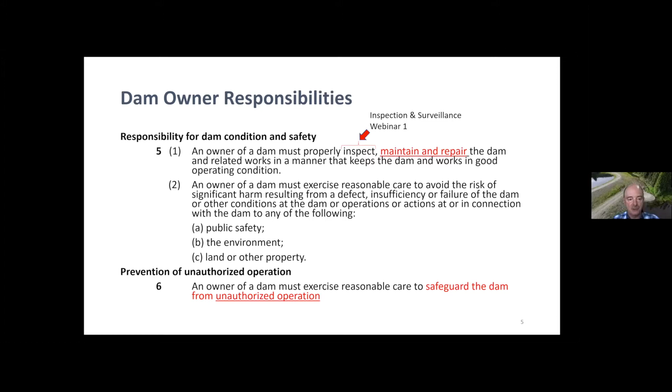So this is where we live, and it's a requirement. It's a responsibility for a dam owner to maintain and repair their dam, keep it in a good working condition, so that no harm occurs to the public, the environment, or properties downstream. And that includes preventing unauthorized operation of your dam. For example, your low-level outlet - you've got to make sure somebody else can't come onto your site and open up a gate valve or stop logs and cause flooding downstream. So those are embedded in the regulatory requirements.

To meet those regulatory requirements, a dam owner is going to have to store the water for the intended purpose. The water license is linked to a specific purpose, and you should know when you need the water and how to operate the dam. A little bit on today, and certainly next Saturday, what do you do when you have extreme inflow conditions - a larger than normal snowpack combined with early season extreme precipitation events? You need to know how to handle those conditions, and they should be embedded in your operations, maintenance, and surveillance manuals. These extreme conditions hopefully don't occur very often, but when they do occur, it's important that you know what to do.

And that's making sure that you operate your dam in the correct manner, and ensure that things like your gate or outlet valve work, because it may be important to use that to draw water down. Make sure your spillways are adequately sized and not blocked. Making sure that you have physical access to your dam, and that the roads aren't washed out or you're impeded in terms of your access.

And then we'll talk about that today. Vegetation often can inhibit access to the dam, the road access or the physical access onto the embankment itself, and it can prevent convenient inspection of your dam. So vegetation management is a never-ending challenge when you own these dams.

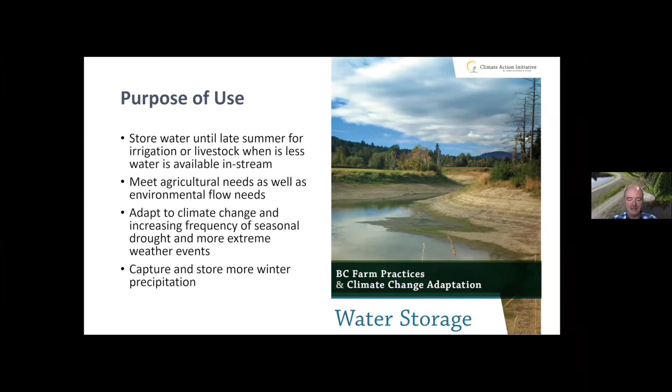If your dams are subject to Part 3 of the regulation—we talked about the dam classifications and what dams fall under Part 3 of the regulation last week—that's probably going to cover most of the people here today, based on the dam classifications that were reported last week by the dam owners.

You need to have an operations, maintenance, and surveillance plan. We often call that an OMS manual. It's a written document, and almost all dams should have this document. The degree of complexity of this document will probably vary depending on the consequence classification of your structure. So we talked a little bit about the surveillance part of that plan last week. We'll talk a little bit about the operations and maintenance part of it this week.

So what would typically be in an OMS manual or this plan? Of course, some information about your dam, and information about how you access it—maybe alternative access routes, particularly if you have an extreme climatic event and one road gets washed out. Well, do you have a plan B? Is there another way to get to your dam to operate it during that extreme precipitation event?

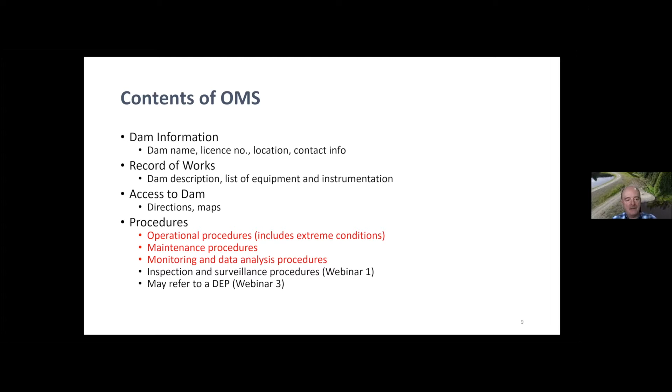Just like last week, to keep things a little bit interactive and for us to understand the audience, we have some polls we would like to run. This webinar has got four of them. They're very short, you don't have to participate if you don't want, it's anonymous. I am going to launch the first poll now. All you have to do is click your answer. I'll give you maybe 10 seconds to answer the two questions: how complete is your OMS manual, and have you referred to it at least once in the past year?

We've got a dozen people who have responded so far. I'll just watch the rate of response and end the polling as it dies down. We're coming up to maybe 50% of the people deciding to answer. I'm able to see the response rate live, but I'll share that with everyone shortly. It's slowing down now, so I'll end the poll and share the results.

Here are the shared results. How complete is your OMS manual? 'I do not have one or have lost it' is dominating the responses from people attending today. If you are under part 3 of the regulations, you really are supposed to have one of these documents, so please try to take advantage of the links Aaron has sent you. Those who do have one appear to be looking at it or referring to it once a year. So there's a little bit of feedback, you can see how you're stacking up versus other dam owners here in the province.

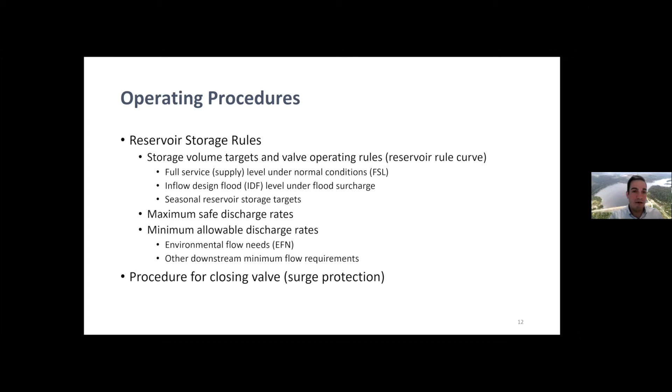So here's going to the rule curve slide. So Dwayne, can you see my mouse moving there? Oh, I'll jump back. Can you see it moving on the screen? Okay, so this is what I'm talking about here.

In the spring, or I should say winter - we're talking January here, right about this time - we don't really have a lot of water in there. We might have a lot of snow around our catchments. It really depends where your dam is, but this is pretty typical. And then as spring comes and it melts, it fills the dam.

So just looking here, let's pretend this here is all our live storage. From our valve to where it naturally spills over, this is our live storage. We may have an annual average demand of this amount, and we typically might have a licensed storage amount for a dry year - so we may be licensed for this much water. So typically we have a little bit of buffer balance in there, and also surcharge, right? If we get a big spike inflow, sometimes we have some additional freeboard here.

So this is what we're talking about. This is our dam system, however, whatever type of dam you might have. And this is what our rule curve might be - the amount of storage going up on the vertical axis and the time from January to December in any given year. So we have freshet, where typically our reservoir is filling, and then we have our demand, where it's typically decreasing, and then it starts to come up.

So this we call the rule curve, for those who aren't aware. We're going to want to basically - in different years, if you were to track your reservoir levels, it would go all over the place, but on average, we would want it to look like that generally. I realize most of you might say, oh, well, we don't need this in our manual, because it's pretty simple - you close it in the wintertime, you open it late in the summer when you need it - and that may be all you need, just two rules of thumb.

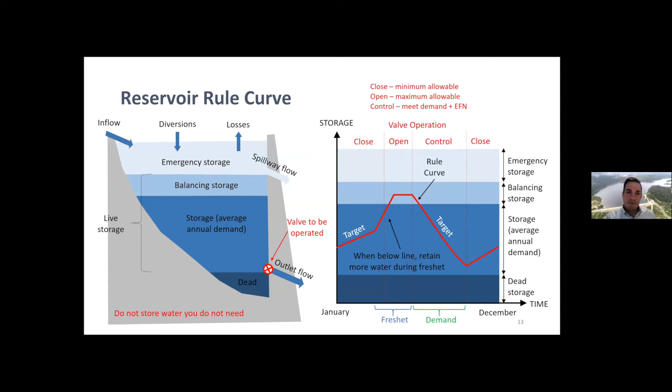So, maximum safe discharge rates. We'll have some examples of this later, but this is it in a nutshell: the maximum flow you can safely release. You need to know what that is.

The stability of your dam and reservoir slopes could be affected. There are hydraulic design limits, whether it's the size of an outlet, your channel, or a number of things. We'll go over this in more detail. Your low-level outlet—there are a lot of things people don't think about.

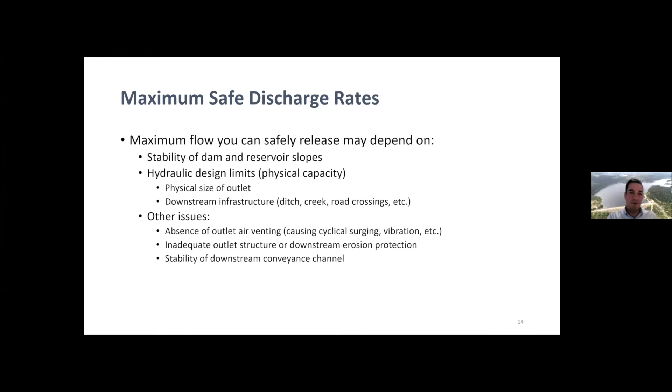Depending on the type of flow going through your low-level outlet, you could cause a hydraulic jump, where it goes supercritical to subcritical, and you may get this wave of water coming up and down inside your pipe. At certain openings, if it's not a properly vented system, you could have surging and even negative pressures. So there are things to be aware of when you plan how far to open your gate, because you may cause cyclical surging, which could damage your low-level outlet. We'll look at that more later in this workshop.

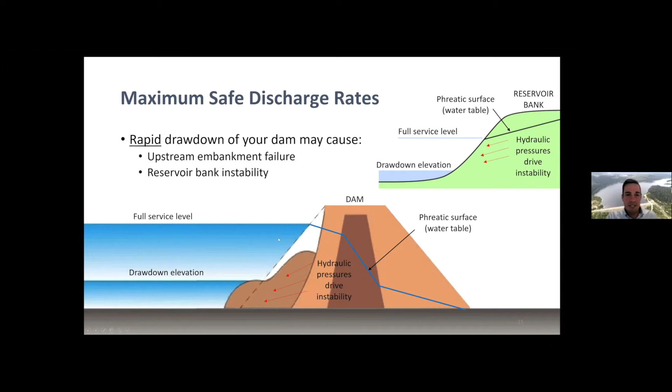Here's an example: if it were the upstream of your dam, here's the hydraulic or phreatic surface through your dam—the level, kind of like the level of groundwater. If you draw this down quickly, it could slump back because you don't have the water pressure holding the dam. It may not be something you need to worry about with your dam, but it demonstrates there could be a lot more going on that you should be aware of.

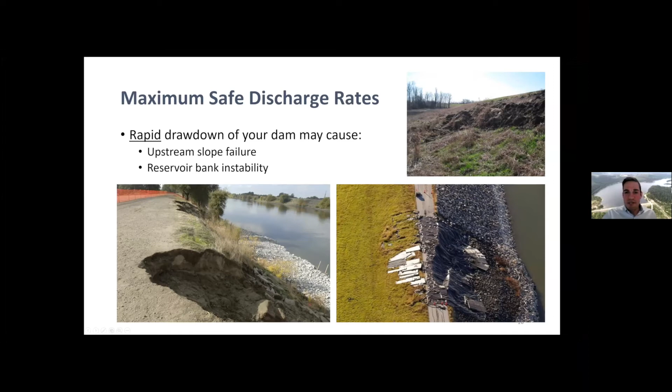Here are a couple examples of some slumping. This is definitely a slope going in. I'm not exactly sure if this was from a rapid drawdown, but certainly some of these are. These are the types of things where you could get some instability.

So, maximum discharge rates. Even if you don't have a flood, if you release water more quickly than it could otherwise flow downstream, you need to be aware of what some of those limits are.

Here's an example of a little creek crossing, a little bridge—you definitely wouldn't want to cause something like that just by the operation of your dam. This structure probably has quite a bit of capacity, but that may not always be the case. If you have a really large low-level outlet, a structure like that could actually have less capacity than your upstream valving. So it's important to look at your design and understand what types of constraints you might have.

Other things to consider too—is it a type of design that could clog the system up? Just a side note, I don't particularly like these designs, because if you ever try to inspect them you're usually knee deep in water, and if you ever want to camera or rehabilitate the low-level outlet, you have poor access.

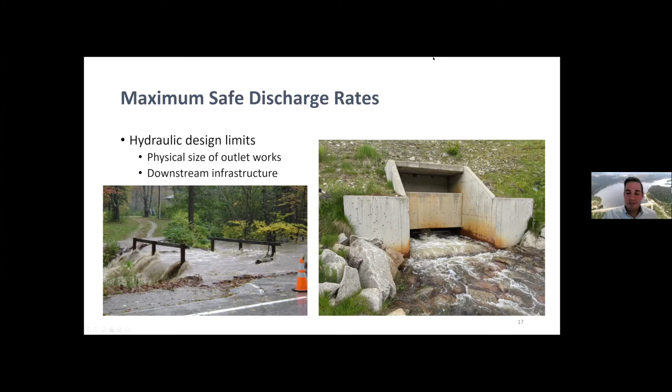Anyway, that's just a little side note there. But we are talking about repairs and maintenance, so lots of things to be aware of, especially when you're upgrading.

So I alluded to this before, the safe discharge rates. If your low-level outlet is not properly vented, here's what I'm talking about, different types of flow. If you have just a small opening and high head, or a full reservoir with lots of pressure, it will shoot out like a jet. So it'll be a different type of flow than if it's, let's say, tailwater controlled with low head. It'll flow through quite differently here, and so the demand of air in this pocket will be very different.

And if you have something like this where you have a bit of a hydraulic jump, where you have a full pipe, this pocket of air could be surging, and you can cause some problems. So anyway, one thing to be aware of is test your valve system, release it, see how far you can go, and try to listen for that pipe. Is it chugging? Is it doing something? Look at your downstream and find out what your system is capable of doing.

Here's an example of what happens if you fill a ditch really full. The side banks get saturated, and then you shut the valve quickly, and what happens is those slopes of your irrigation ditch are still saturated. There's no water pressure behind it, and it slumps in. And so you could have failures like this.

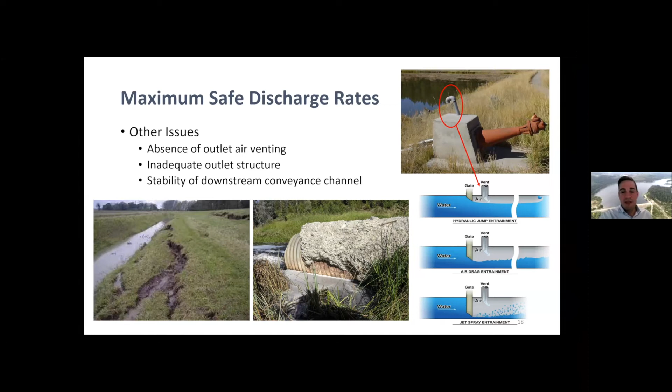Other problems are excessive scour. If it's not properly protected from that erosion or those tractive forces, it can break down over time, and so that's another constraint to your system.

All right, so operating under extreme conditions. I just want to reiterate, or at least make a distinction here. Extreme conditions are not emergencies. We're going to be covering emergencies in our next webinar. So we're talking about under typical design conditions.

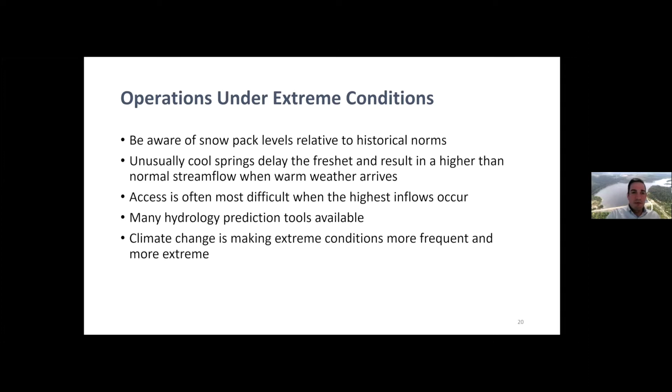Our dams are designed for sometimes 1 in 200, 1 in 1,000 years, so we need to be aware of those and plan ahead. Here's an example: you could jump on the River Forecast Centre, learn about and be ready for all kinds of events. I'm just going to share a quick link here. If you were to check right now, the interior and places in the far north do have quite a bit higher flows, and so we can expect that in the spring.

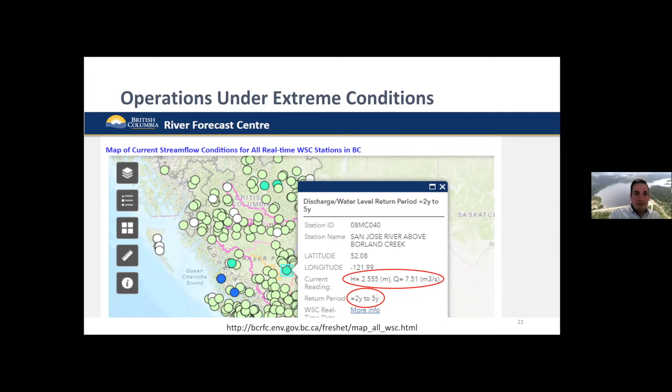Here's an example we covered in our last webinar, and we're going to take it a little further. Let's pretend you have a dam, and you have an extreme rain on snow event. Here's a clue: it's less than the design event. The reservoir is near maximum, so the surge water is coming up.

So everyone feel free to chat, you can chat to myself. What would you do, right? Extreme rain on snow event, reservoir is near the maximum. Does anyone have thoughts on what they would do? Would you just kind of hang tight? Would you check the river forecast system?

Here's a little more information. The downstream Forest Service road has just failed. Houses below are beginning to get flooded. Let's say you've got a downstream neighbor calling you, they think your dam might have breached, and they're starting to get a little worried. What do you do as a dam owner? Do we have any comments?

Hopefully your OMS has some guidance for how to operate that dam under those extreme inflow conditions. Exactly. And if you have your OMS manual, you know how far you can open your valves, you'll have a little more information there. In the interest of time, I'm going to just keep going here.

And the important thing is you do not compromise dam safety. So you always want to allow the inflow of flood into the reservoir to pass your dam, right? We talked about the purpose of your dams at the beginning, and these are not typically flood protection dams. These are for the purpose of irrigation. Sometimes they also provide some attenuation, but that is not the purpose of the dam. The purpose of the dam is to provide irrigation water. So when a flood comes, you just pass it through the dam.

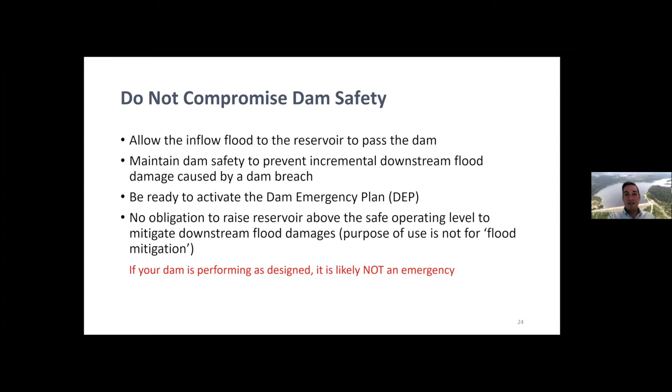But if you don't do that, you could potentially overtop your dam. So if your dam is performing as designed, it is not an emergency. You stay the course, you open your valves, and you pass that flood.

So there's no obligation to raise your reservoir above safe operating conditions. Dam performance - a properly designed, constructed and maintained dam can withstand larger floods and earthquakes. So do you know what yours is designed for?

Those are things you want to know, and they should be listed in your operation maintenance surveillance plan. If you're looking and the river forecast system says you're going to get a 1 in 500 year flood, and yours is designed for a 1 in 200, you might want to plan ahead and start drawing your reservoir down so you have additional capacity, because you know it's not designed for that. So again, there it just says OMS manual.

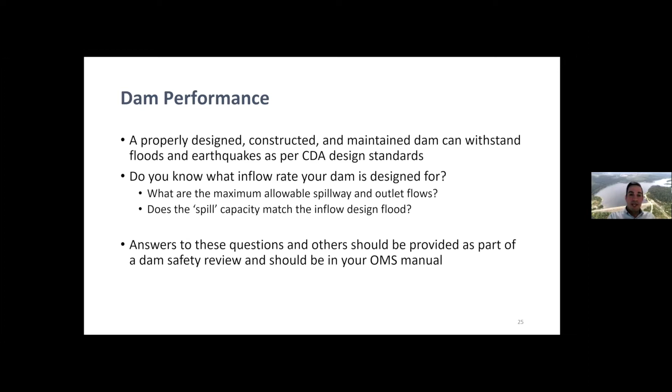So, sorry, I'm jumping through here. I'll just skip that one there.

I think the answers would be pretty clear, especially if you knew what's in your operation maintenance surveillance plan, because it'll say if it goes beyond these levels, it's probably an emergency. And then you'll have your dam emergency plan, and we're going to talk about how to activate your emergency plan, who the notification lists are, and so forth.

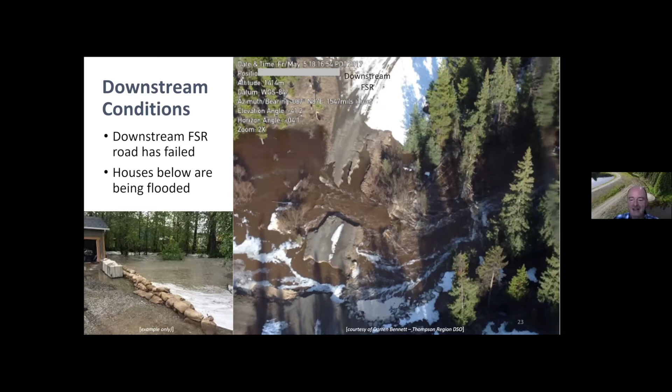So, Dwayne, you can take it from here. Sure. Yeah, just wanted to come back to this very briefly. I mean, if this is happening downstream, it's not because your dam's failed. It's because the flood that's traveling through that watershed is an extreme event. And as long as your dam is performing as expected, you're fine.

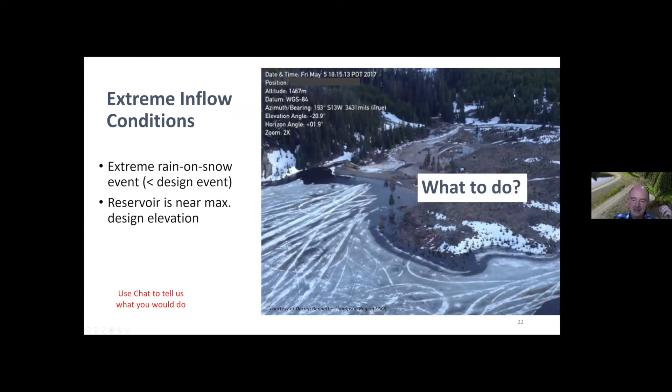But the interesting thing is, if you felt obligated to try to help your downstream neighbors by holding back extra water, and by doing so that causes your dam to overtop and breach, then you're kind of liable because you weren't operating it the way you should be operating it. So it's really useful to do the mental exercise of how would you operate your dam under those extreme event situations, and is that extreme event situation actually over and beyond the capacity of your spillway typically to pass that water?

And then we do have that as an issue for some dams. The spillways really are under designed as we get more and more information about the return periods for extreme climatic events. Climate change is also throwing another wrench into the whole thing, because we can expect to have perhaps more frequent flood events. But we want to make sure that you're operating as safely as possible and not doing something that actually creates a situation where the dam breaches.

This dam did not breach, right, Aaron? No, it didn't. That's about as bad as it got. Yeah, but that's about as bad as it can get. Yeah, yeah.

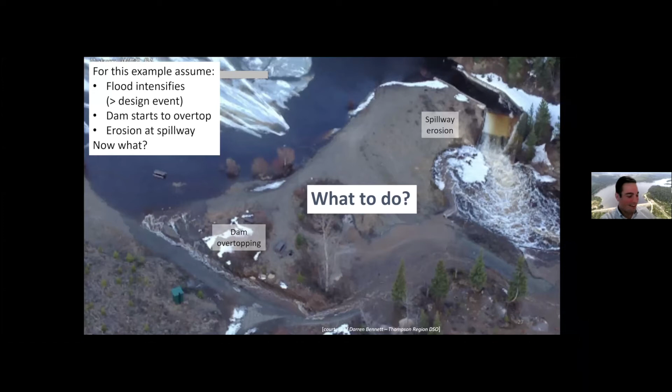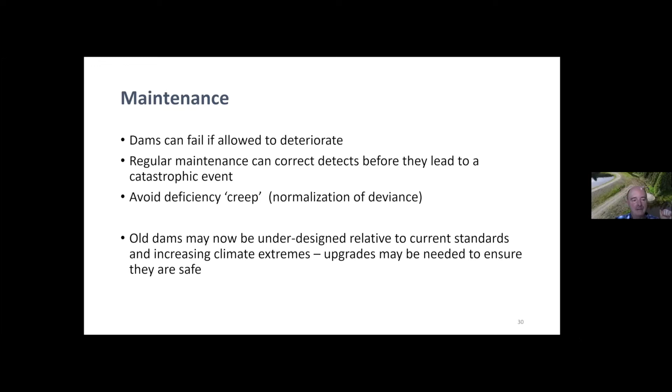Now, of course, to engage in maintenance, you need a schedule and some financial resources to handle that. So you should budget accordingly, set aside some money for routine maintenance, and then for those occasional and more major repairs, you need to know what dam components you have and what their maintenance requirements are, particularly mechanical components associated with your low-level outlet.

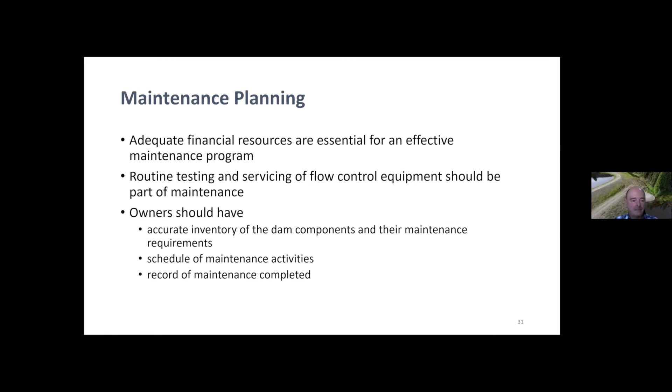Hopefully in your OMS manual you have a schedule of maintenance activities. It's kind of a reminder, no different than changing the oil in your vehicle, and occasionally doing some transmission fluid and other major repairs. You can think of that same schedule needing to be established for your dam, hopefully documented in an OMS manual, and keep a record of what you did and when you did it. So we're going to go through some examples we were able to pull out.

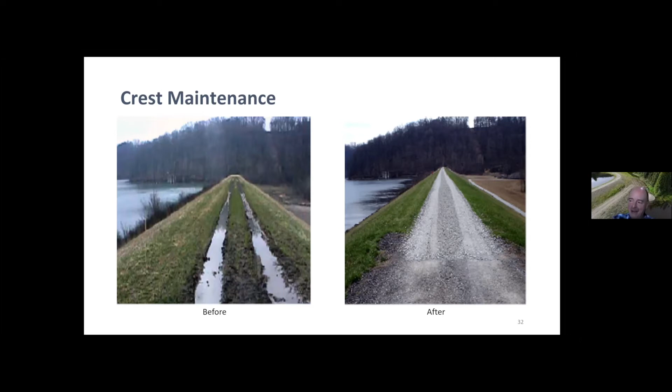Another thing too, always make notes of this, because oftentimes you get a dam survey and you might even have localized settlement that's been regraded, and maybe in one area you keep regrading it, and what you don't realize is you have differential settlement, which I've seen. So always make a note and take a photo for the file, it's really useful down the road. If you run into these situations, you can go through and find out what actually occurred, because placing this material on the crest could be hiding a more serious deficiency buried in the embankment.

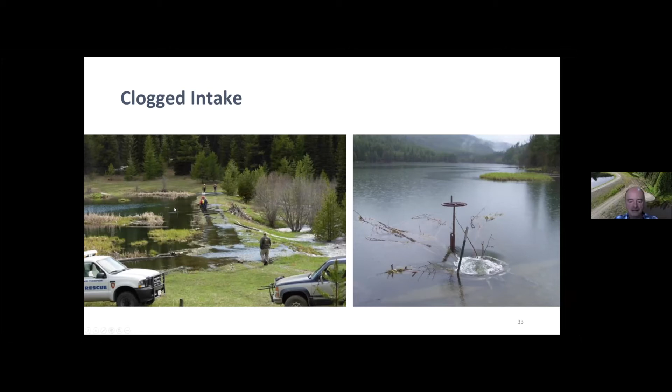We talked about this last week in terms of identifying deficiencies. Spillways - beavers like to build things in spillways, so you're going to have to keep removing these blocked spillways. The spillway is often a very critical piece of infrastructure to bypass that flood that may come, whether it be a spring freshet flood or an intense rainstorm later in the year. So keep those spillways clear of debris, whether created by animals or maybe some slumps or small landslides that might be blocking off your spillway.

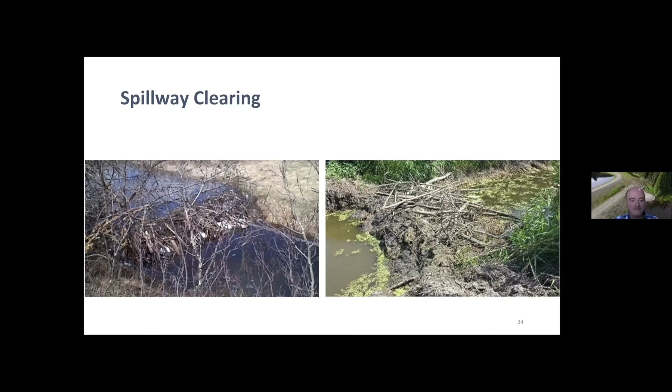This is an example, a before and after, just downstream of the dam. So there's a bit of an armored spillway here, but it's fairly full of debris and the trees are growing up all around it. And this is after - you can see the same boulders here. Some of the trees have been removed and pulled out of the way, so there is less of a tendency for a log jam to be formed there, blocking the whole spillway, and then backing up into the reservoir and overtopping it.

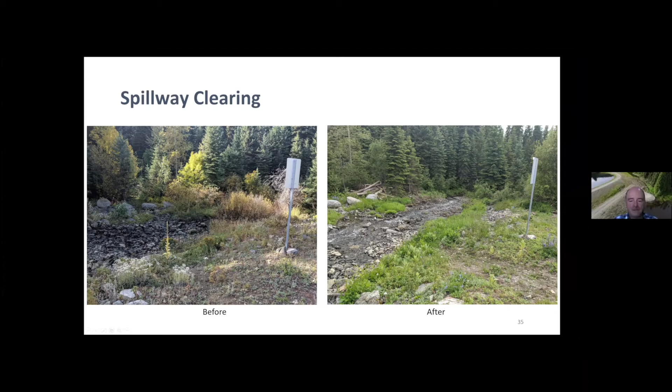And if you do have grass, it should be kept mowed so it's easy to visually look at your embankment for small depressions and deformations that might be signifying some sort of impending damage that's occurring within the embankment itself.

And a couple more examples, before and afters. The typical situation is that most people just don't get around to clearing off their trees until it gets really late. The dam safety officer is saying, do it. And then finally they're saying, you really have to do it, or we're going to do it for you and send you the bill for the maintenance.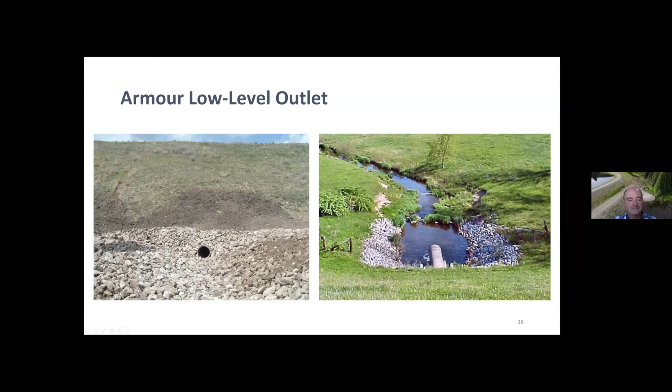And if you were to look at this close-up view, well, ignore the use of tires and car chassis as a substitute for riprap - kind of not recommended, and it looks like it's not working very well either. You want the appropriate kind of riprap that's continuous, and often we end up getting a little bit of a beach area established on your embankment.

So the riprap doesn't have to run all the way down to the bottom of your dam on the upstream side. We do have to have an idea what's the typical reservoir elevation fluctuation throughout the year, and protect that with the riprap. There's guidance as to the size of the riprap and the vertical extent relative to your full supply level. They're calling it still water flood pool.

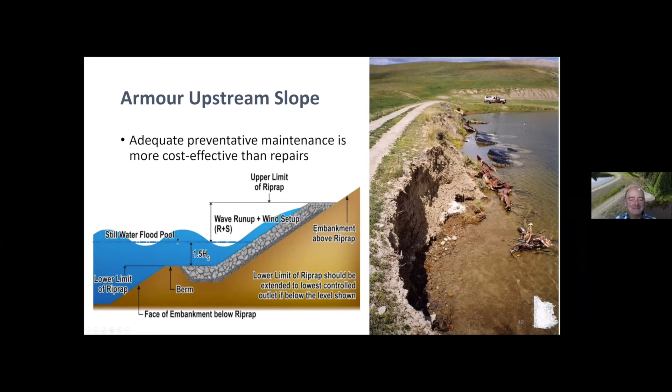So vegetation is pretty good for minor erosion protection. I mean, this example is not much for vegetation helping out here. So yeah, those are probably the more common maintenance things that agricultural dam owners are probably dealing with.

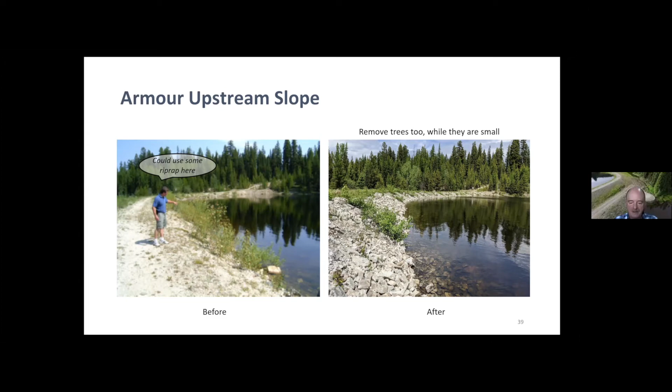We didn't, I don't have any pictures here of dealing with burrows from muskrats or gophers or whatever wants to dig holes into your dams, but we talked about that a little bit on the inspection workshop last week. So I have another poll.

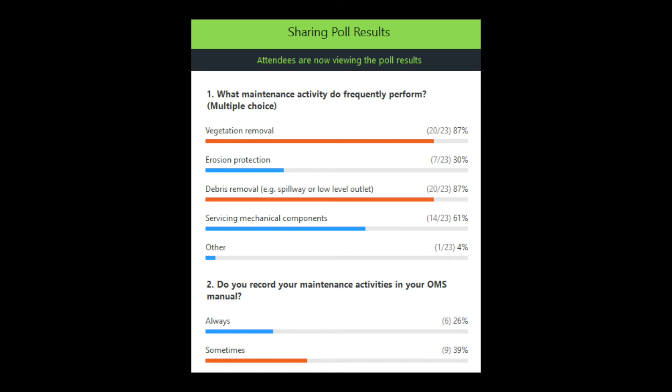If you want to see how other people are doing compared to you, here's the answer. We're seeing vegetation removal and debris removal from the spillway tied for the most frequently performed maintenance activity. Servicing the mechanical components is showing up pretty good, and erosion protection, riprap, or stuff like that. So most agricultural dam owners will be doing these activities.

And after you've done the activities, do you make a record of that? Some people record it always, and some people sometimes. So there's always room to probably improve the documentation of those activities.

And sometimes those documentations can be helpful, like years or decades later - it may be evidence that helps somebody else diagnose a problem that was slowly developing in your dam that you yourself didn't even know, but you're always filling in holes in one specific location. Well, we kind of need to know that, and that will guide the detailed inspection, particularly if you have to do a dam safety review.

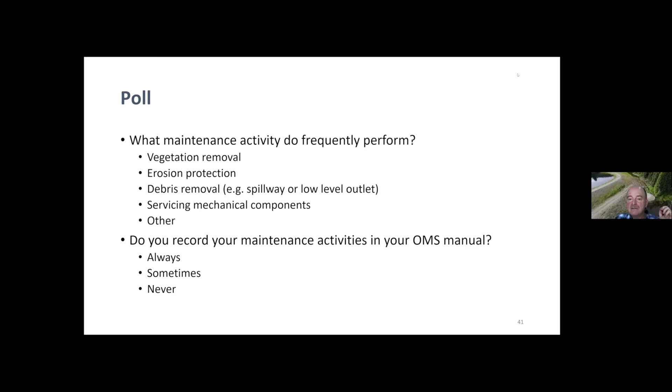Good, I'll stop that. Is this mine or is it back to me? I think still, right? Yes, okay.

So that was a little bit on maintenance. Just touched a little bit on monitoring. We kind of expect that most of your dams don't have a lot of instrumentation.

Here's a little section from the regulations. An owner of a dam must install instrumentation necessary to essentially assure that the dam is performing well - that's what they're really asking. Maintain and replace that instrumentation, collect readings, analyze and interpret that instrumentation data. So this is how it's kind of specified in the regulations.

And as I said earlier, visual observation and your eyeballs are part of that package of instrumentation. So simply documenting the reservoir elevation against a staff gauge or against a collection of boulders that you may have placed along the upstream slope of your embankment - hopefully, if you have some seepage issues, you're actually tracking and measuring the seepage.

And so the regulations kind of want you to do that, and we'll just touch on a little bit of that here today as well.

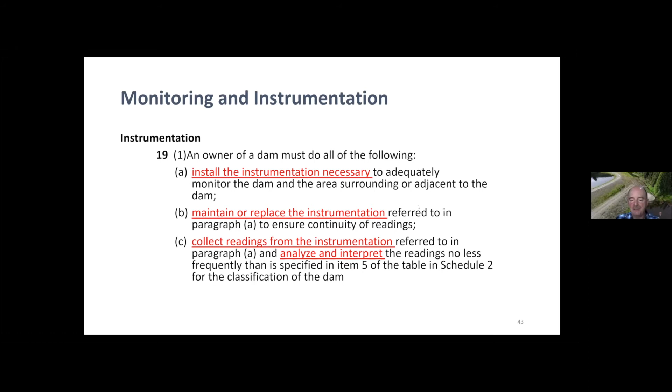And some of this instrumentation and monitoring, you're doing it because you have an idea of what failure modes could occur - you have an idea how your dam can fail. So you're looking for evidence that it might be moving towards that failure, and you want to be able to know how well your dam is performing.

So if you don't really look at it and measure something, you may not know how well your dam is performing. You should have some idea of what is acceptable, like the acceptable amount of seepage coming through your dam or acceptable amount of water going through your spillway, and how to measure that. And some of the answers to those questions could be embedded in your OMS manual.

So what instrumentation, if any, do you have on your dam? Is the instrumentation itself adequate for your dam? Your DSO might be asking questions like that - do you have enough instrumentation to monitor the performance of that structure?

And do you measure it and record that instrumentation data frequently enough? We'll look at the frequency here shortly. And how do you review and analyze that instrumentation data? You don't want to simply take measurements and record them, stick them in a book, and never look back at the old measurements - this year, last year, 2 years ago - to see if there's any change in that behavior. All that stuff should be captured and recorded in some sort of document, typically as a chapter or section of your OMS manual.

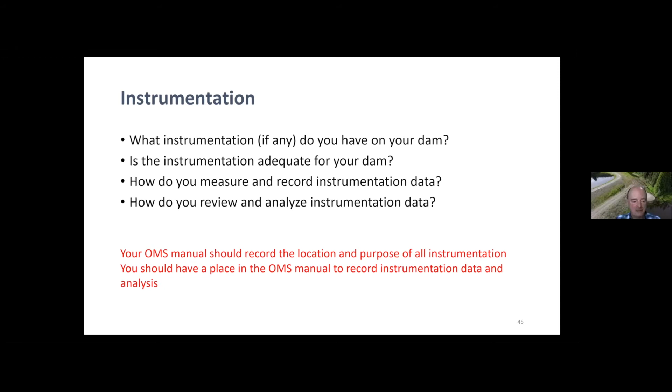So what type of instrumentation might you have? I mentioned just moments ago, a staff gauge, some sort of pole with paintings or markings on it with the water level indicated. So when you're standing on your dam, you can take a look and say, okay, the water level is at this value on this date, and make a note of that.

You may on your gate stem have some sort of ability to measure whether it was fully open, half open, or what the amount of opening was on that valve or gate. You may have a piezometer, which is a device simply to measure the water level, maybe measured at the foundation, but you read it up here someplace. This piezometer may be further down at the downstream toe.

You may have some structure to capture seepage passing through your dam, and then measure the amount of water going over it. There's a thing called a V-notch weir, which really all you need is a ruler to measure the quantity of seepage passing through. You may have an outlet weir as well. So there are some quite simple, low-tech instrumentation options that might be appropriate for your dam.

Of course, visual observation is always the best. Some of the disadvantages of instrumentation is it's placed at a specific location in the embankment, and it may not be the appropriate location. Whereas when you do your visual inspections, you're looking at the whole thing—upstream, downstream, the crest, the abutments, the low-level outlets. You're looking at everything when you do your visual inspection, so it's a bit more comprehensive that way.

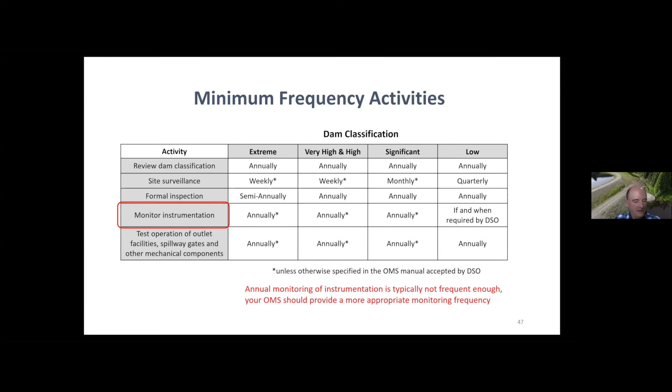So I'm going to pass it back to Aaron.

All right, so seepage monitoring. On that last slide there, Dwayne showed you a couple things. I'm just going to jump back real quickly to it. So this one here is just two little perforated pipes going into this drain, which is kind of a granular or sand material.

I'm going to talk about this example again real briefly because you can see I have my thinking face on. We had quite a bit more flow coming out of this one, which you would call the left drain. Again, another reason why you want to be consistent—you always want to reference things looking in the direction of water. So the left drain there was actually getting quite a bit more water. But anyways, this is typically what we might do: just a bucket and timer, real simple tech, and fabulous information. I'll talk about that one a little more in just a bit.

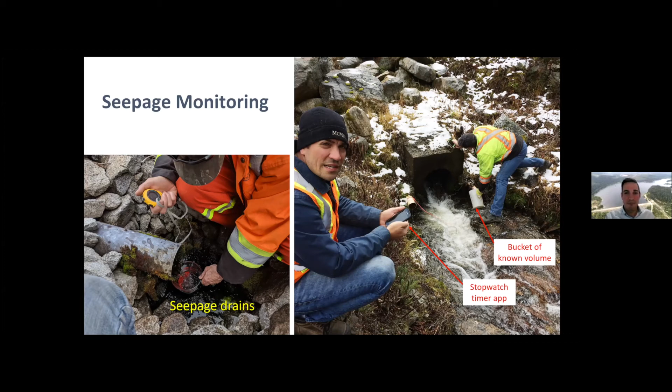So here's some more seepage monitoring. Maybe you don't have two direct perforated drain pipes where you can bucket time. It might go into a little catchment area with a V-notch weir—could be a 90-degree or 60-degree sharp-edge weir, whatever it is. The main thing you're looking for is change. We're not going to go into too much detail about the actual analysis components, but really you just want a way to measure the performance of your dam.

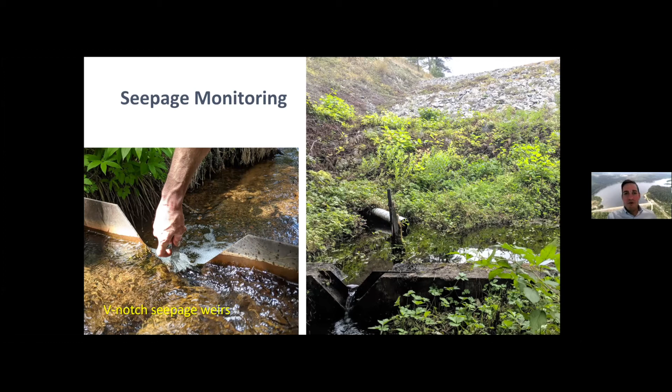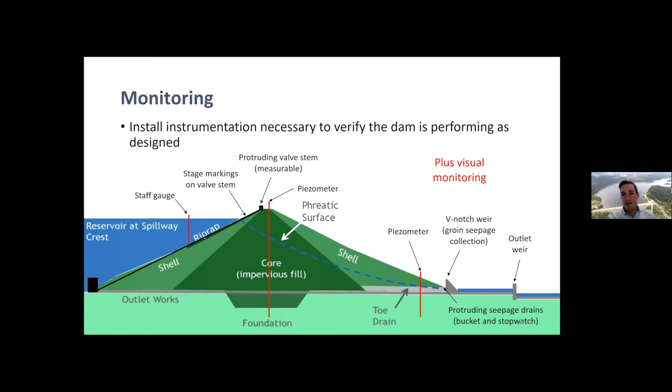So whatever is most practical for your dam, you want to put it in. Again, instrumentation is a bit of a double-edged sword—if you don't need that many pieces, don't put them in. Otherwise, you probably just won't end up monitoring them if they're not useful information to you, and then the regulator is going to ask why aren't you monitoring your instrumentation. So you want to put in only the amount of instrumentation that's valuable for you to understand how to operate your dam and ensure it's performing as designed.

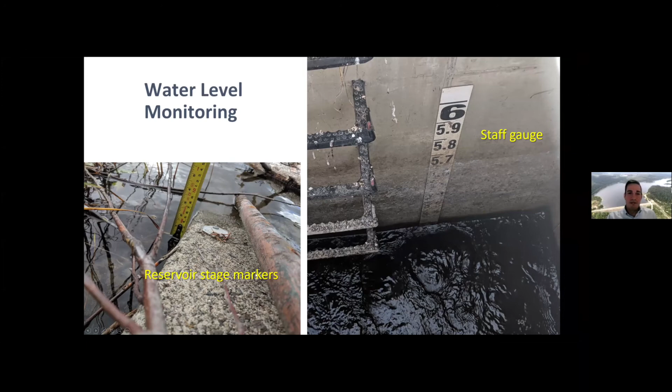So here's an upstream reservoir staff gauge. Instead of having a staff gauge, say in a valve chamber or something, you may just have markers on your upstream valve stem. So something like that—whatever works for you is going to make it more practical.

So here's one of those piezometers or standpipes. Like I mentioned before, be consistent. In this particular case, the owner always measured from the top of the well cover.

It was easy because you can slap a ruler on it and it's consistent, especially because in some cases they'd have 2 or 3 piezometers at different depths side by side in the same well or hole. That way, if one's a little taller than the other, they always have the correct elevation offset from a reference point. So whatever you do, be consistent. That's an example of how you just got an electronic water tape that beeps when it hits the water.

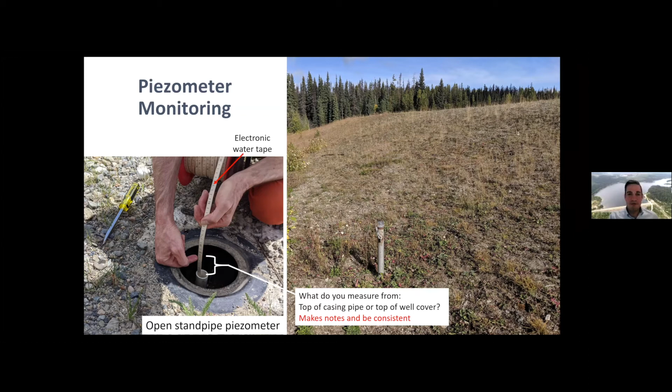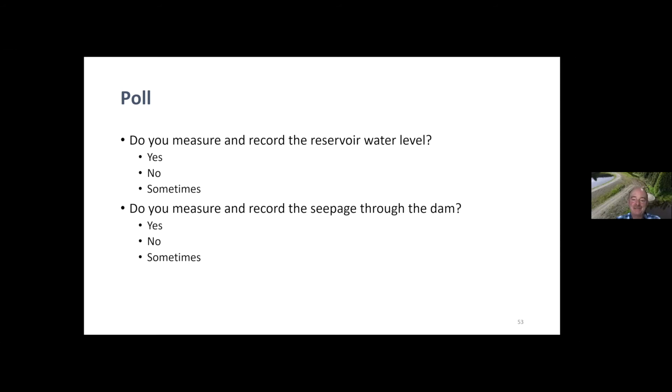Good, so I'll stop showing that. I wouldn't be surprised if a lot of you that said no may actually still be looking for wetted areas or aquatic vegetation. If you note the fact that there's wetted areas and aquatic vegetation, you are looking at the difference of that from one year to the next. So there is some seepage monitoring even in visual inspection, and sometimes that's adequate for your particular dam or location. If suddenly cattails were growing in a location where they never grew before, that's a warning. Could be a problem.

So, equipment testing. I'll try to keep a faster pace so we stay on time here. So again, one more thing: it's right in the regulation. Do it annually. Should you do it more often? Maybe. If so, get it in your OMS and plan it.

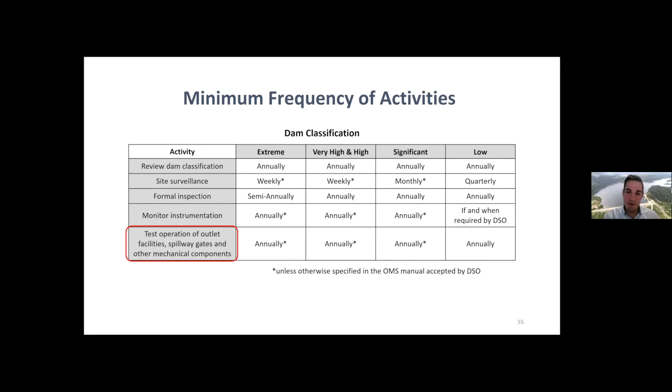Just like your testing, same for your instrumentation. You want to try to set up your dam so things are practical. If they're impractical, you probably won't do them. So you might want to modify your valve or your wheel or something like that so it's easier to operate. Whenever you can, make it easy, whether you make your records on your phone or whatever.

So we're going to look at equipment testing a little. Do you know all the equipment on your dam? You kind of have to have an archive or a list in your OMS that lists all the pieces you've got. Are they automated? Are they run by some sort of SCADA system? Probably not for many of you, but you want to know what those pieces are, especially if you're delegating it to other operators. Maybe you have another licensed user who fills in for you as well and does a bit of it, so it keeps you both on the same page, recording information in the same place.

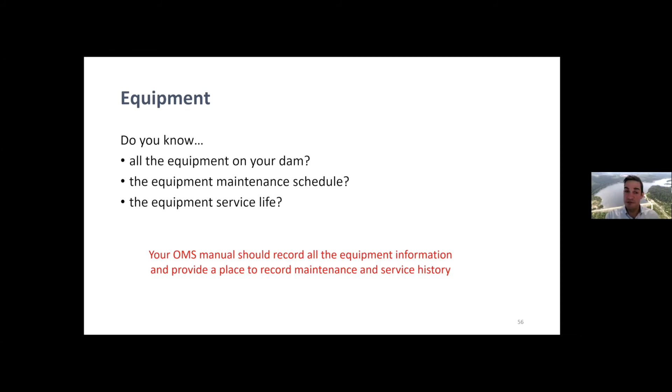Do you know the service life of your equipment? Is it near the end of the service life? Again, just like a vehicle, you want to have all that information.

So here's a typical slide gate. Actually, that's a screenshot of a list we put together, I think it's in the link of that big dam safety management binder example I sent earlier today. You're going to want to make it as simple as possible: crop just the little piece that's useful, put that, maybe attach it to the bottom of your surveillance or inspection form. So when you do your annual testing of your equipment, you can do it right there quickly, right on your surveillance manual or whatever it is.

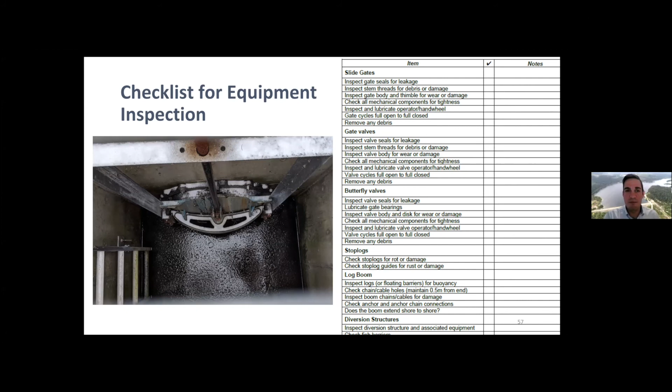Again, we covered the surveillance and inspection documents on the last webinar, so we won't go into that more here. So here's another example of a slide gate test.

During a formal annual inspection, a valve test was requested. And I say requested — if there's any consultants or anyone else on here, or certainly all you operators, if you have an engineer or someone come do this for you and they ask you to open a valve, remember that it's you opening the valve. You should already know what your safe limits are, all those things. And if you're a consultant or an engineer, you want to make sure you don't demand those things if you don't know anything about that system.

So in this particular case, a valve test was requested. We wanted to do it during an annual inspection. The operator conducted the test. We checked beforehand — they didn't know the maximum safe discharge for that valve. Since the maximum was not known, what we decided to do is slowly, incrementally open it up and look at the whole system, to see what we could learn about it. So it was a valuable process.

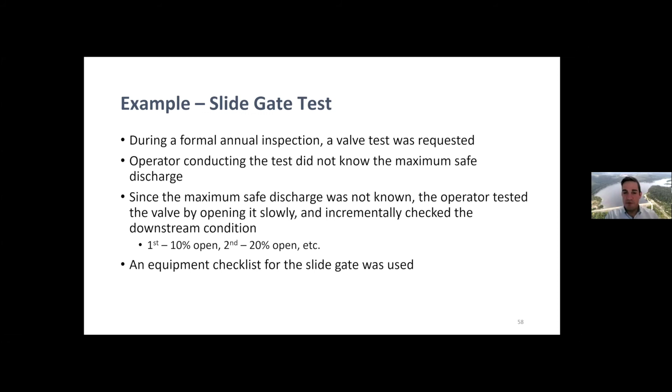An equipment checklist was used in this case, and we went through it for that particular system. I'm going to continue this: prior to actuating, much of the checklist was already done, so we just informally started going through the checklist. In this particular case, it's a chamber on the crest, operated with a gate wheel, and it's all enclosed.

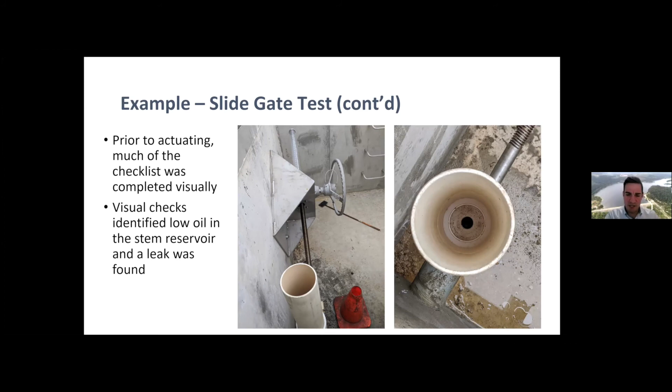The stem goes along the upstream face of the dam, and it's all within an oil reservoir. You can see some of the oil, and we even see where it leaks. It's like a vegetable oil leaking into the chamber. We could see it in there, so we knew it needed to be topped up, and there was a small leak in the system. Other than that, everything worked. It was locked appropriately, and everything was generally quite new.

Before actuating the valve, we looked at the downstream conditions. Here's the low level outlet outfall, and this has been a riprap channel. This is a photo from the same location looking downstream, out of the page this way. The release channel goes this way. You can see the top of a forestry service road. We noticed little things like vegetation, and the slopes are fairly steep. Just a couple things noted in the inspection prior to the test.

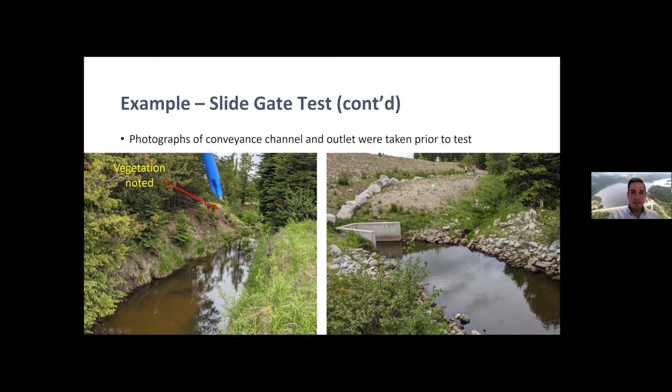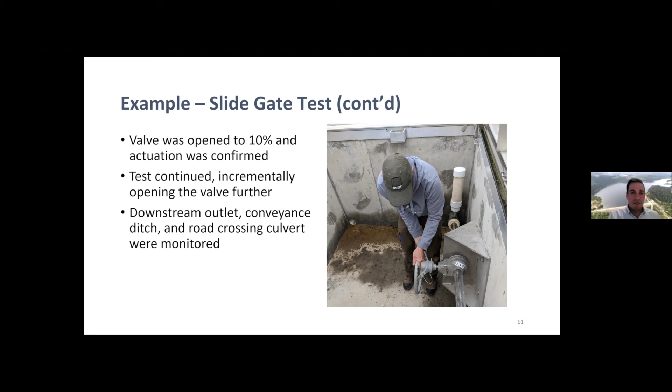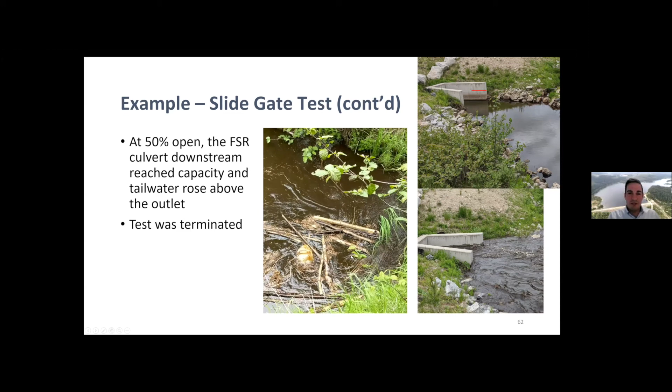You can see how high the water was here. If I go back, you can see it was swirling at that pipe, and the water was probably up to about here—you can see a bit of suction, water soaking up into the material. It might have been running like that for 5, 7, maybe 10 minutes, but that was enough time to saturate this bank.

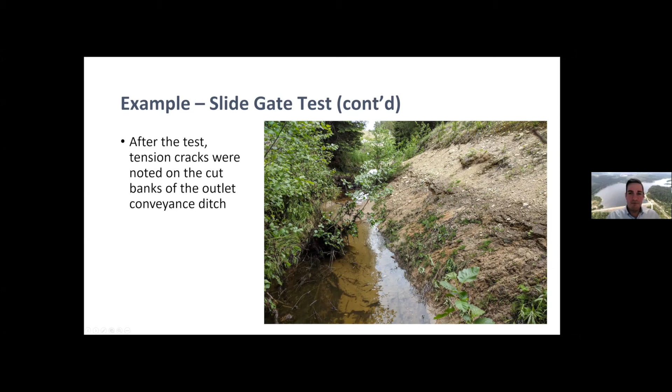When we shut the valve, even though it was shut relatively slowly, the pipe drained the material out quicker than this bank would have liked, and some of it slumped down—again a function of the steep banks here. You can see some of the sands got redistributed in the bottom of that channel.

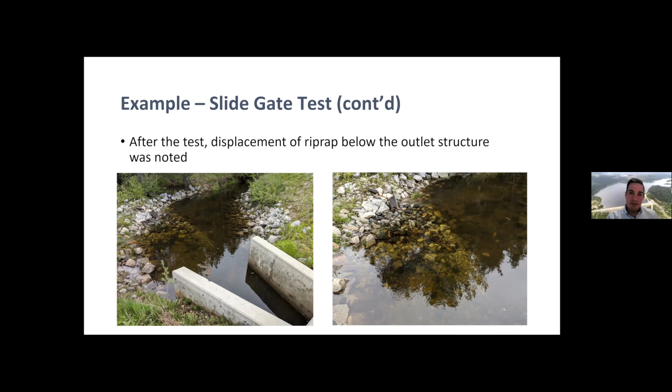Maybe we should never open this valve more than 25%. Even in an emergency condition, if you open it 50%, you're probably going to fail the slopes of your outlet system, causing some slumping, and then you get 0% because you can't release anything. So it was really important to know this. Now, I wouldn't say the system's undersized—it's just that the valve is bigger and the outlet is bigger than it needs to be. Now we know what the limits of the downstream system are.

So we will note that in our OMS system not to open it beyond that safe operating limit. This is basically summarizing what I just said: a new maximum safe discharge setting. Even if you're going to 25%, you definitely want to knock that flow back nice and slow—knock it off another 5%, go do some surveillance checks, maybe clear the spillway, come back, knock it another 5%, and then set it to where you want to go. These are all things you want to consider.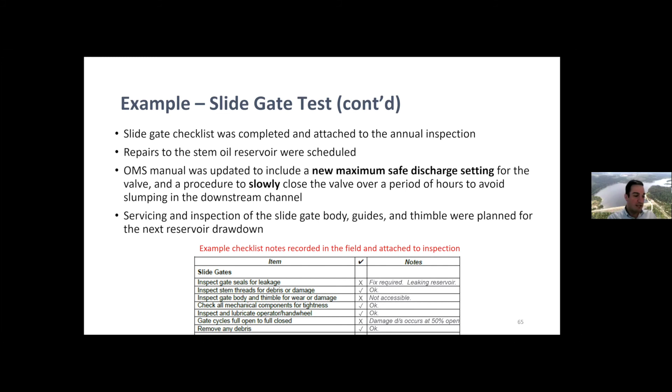So a perfect example of how a simple surveillance, or simple gate test, all of a sudden brings a lot more information to your OMS and makes your whole dam safety management plan a lot more robust, just by taking notes and adjusting your planning. So, repairs—I've got a few more. Dwayne, I'll try to keep the pace up here.

Yep. So Dwayne mentioned this: adequate financial resources to operate a dam. It is an asset, and it's only going to be a good asset if you continue to reinvest in it.

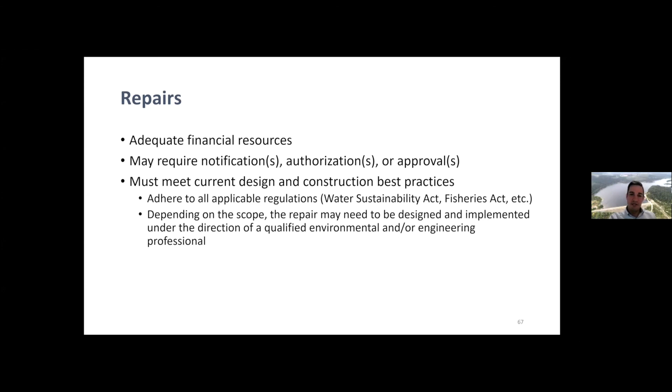Do it early, and you'll save yourself a lot of headache and potential big capital cost upgrades later. You've got to meet minimum best practices. They have changed with climate change, and there are other things that have raised the bar. So sometimes we just have to bite the bullet and get it up to snuff.

There's a difference between a repair and an upgrade. I'm not going to go into too many details, but the best thing to do is call your regulator if you've got questions about how to navigate this, or whether this is something you need to do a full application for. Whatever type of work you're doing, it's best to talk to them first, discuss the scope of work, and then proceed.

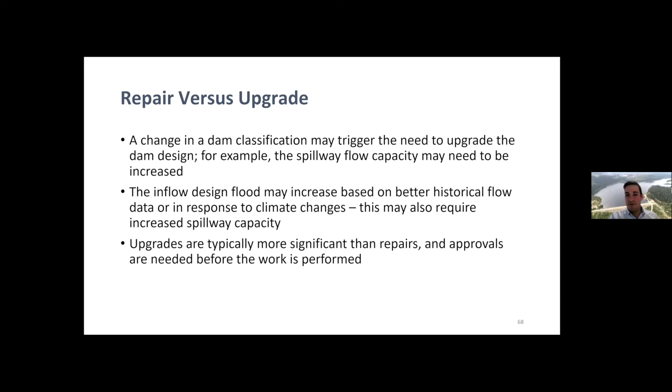I'd recommend that no matter what, but we'll give you a little sense of what may be required. Quite often, if you have to divert water around or maintain environmental flow needs, those types of things are definitely going to require some sort of formal application through the dam safety branch.

Again, contact your regulator. So a repair may be considered an alteration or improvement to, or replacement of, all or part of your dam, and must be authorized. If you're repairing a valve or something like that, you may not require authorization. But if you're taking something off and actually making an alteration, maybe changing the size or doing something of that nature, I'd definitely assume you'd plan for a full authorization and application.

The extent of information you'll need really depends on the scope. The question is, does it fall into routine maintenance or not? If it's routine maintenance, you can go ahead and do it — for example, removing vegetation on your dam is probably just routine maintenance. So there's a bit of a gray area there, and again, it's best to talk to your regulator.

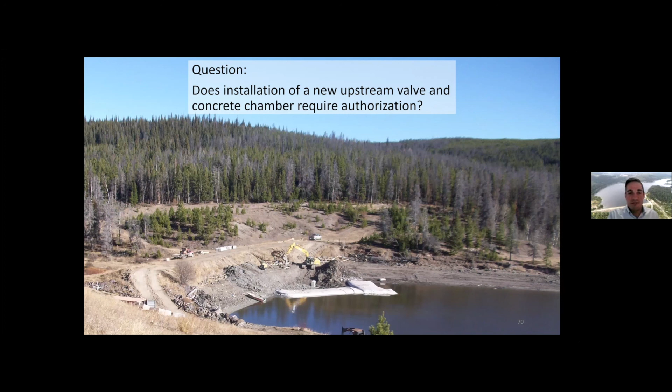So the question: does installation of a new upstream valve and concrete chamber require authorization? Here's a picture of some work recently done on a dam here in BC — you can see some big bags, or bladders, in the creek, quite a bit of water work. This is obviously yes. Generally, any work that goes beyond routine maintenance requires authorization.

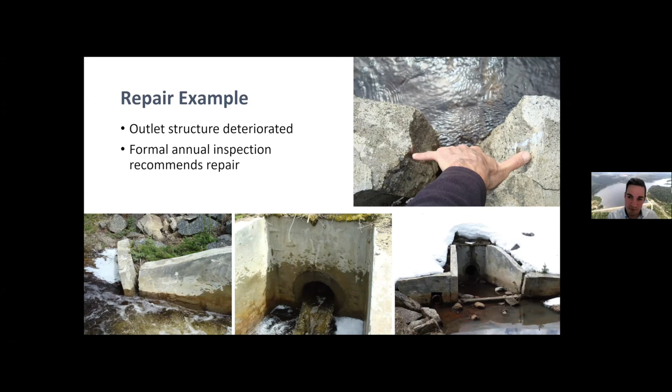Here's a repair example. This one did need authorization as well — we're working in the water, so it goes beyond routine maintenance. Clearly the outlet structure is in rough shape. If your outlet structure looks like this, it's probably time to spend the money and get it fixed up. Even if you can't see how it could potentially cause a safety problem, it just takes one little thing.

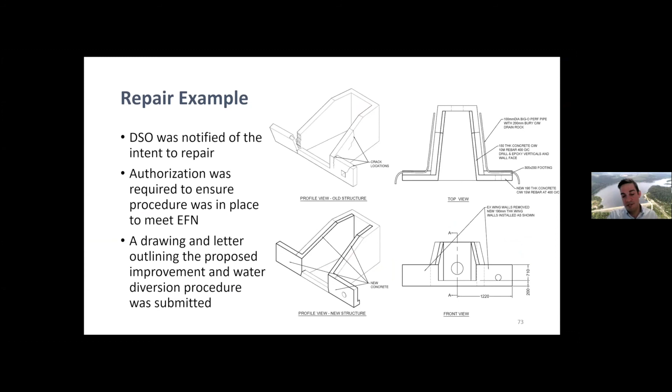Here's an example of the drawings that were put together. The DSO was notified of the intent to repair. There was some discussion — environmental flow needs did need to be maintained, so there was a bit of a diversion plan. A simple drawing and letter was submitted and approved, and the as-built, or record drawings, were put together afterward and filed to their records and to the dam safety office.

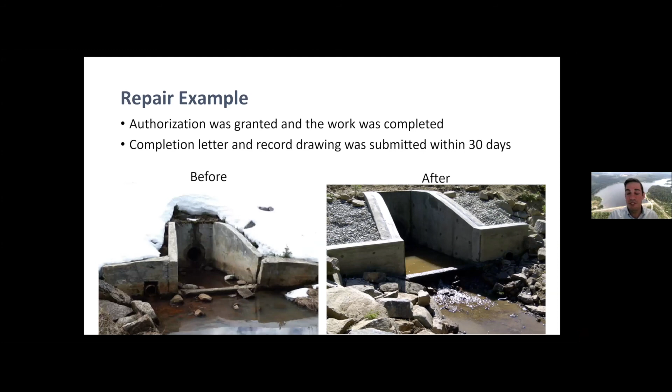Here's a picture of before and after. Again, you have 30 days to submit your completion report, which can be very simple. So again, update your records — there are some requirements as to the timing and what type of information needs to be included. Just refer to your regulator and your regulation.

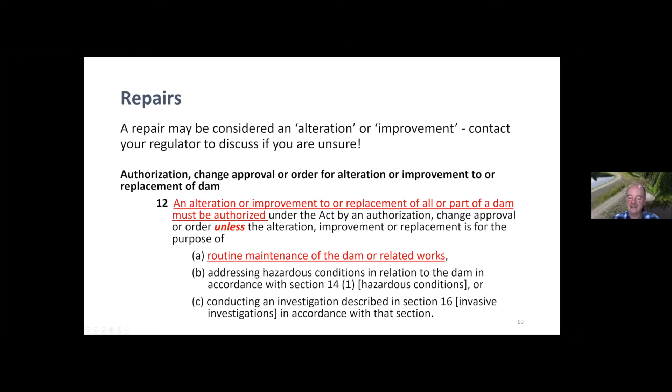Thanks, Aaron. I just wanted to come back and touch on one other thing under section 12. If you've got some sort of impending failure that could result in a release of your reservoir or a breach, or you have hazardous conditions and an idea of how to conduct repairs to protect your dam, do so. Your primary objective is dam safety, which links to the safety of everybody — the environment and people downstream. So you don't need to worry about getting approval if you have to do something very quickly to save your dam — that would be an emergency condition.

We're going to talk about this at more length in the next webinar — for instance, if it's maybe a level 1 emergency that's slowly developing and you're already on the phone with your regulator, they may be able to issue you an order, so you can do work that meets the Water Sustainability Act requirements under that order.

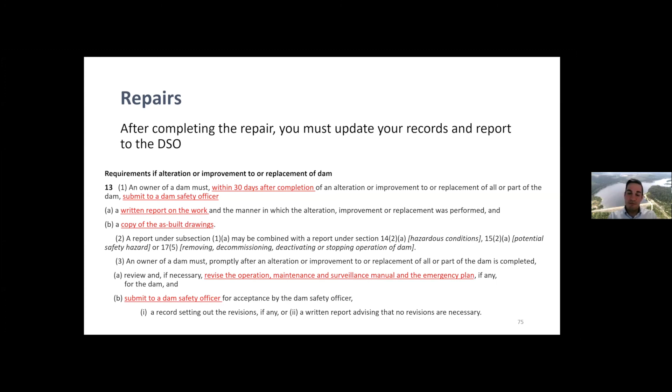So you wouldn't have to put all those things. I joke and always say never waste an emergency, because sometimes you can save yourself a lot of paperwork. You should never plan for that, but in an emergency, oftentimes you can work with your regulator, and a level 1 emergency, you want to be on the phone with them, and maybe you can intervene under an order, and that would be the best way to go.

But in other cases, if it's going to breach, follow that damn emergency plan. You've got to get your notifications list, and you've got to act. So we're going to talk a lot about that in the next webinar.

So we're coming close to the end of this one, and we just have a couple of slides stressing the importance of keeping organized and keeping records of your maintenance and your repairs. The regulatory requirements require you to do more than just do what's required - you also must record it. It's built into the requirements.

So keeping records is a key component of a thing called a dam safety management system. We're just here to say, please try to do your best to record all the activities that you conduct on your dam in terms of surveillance, maintenance, and repairs.

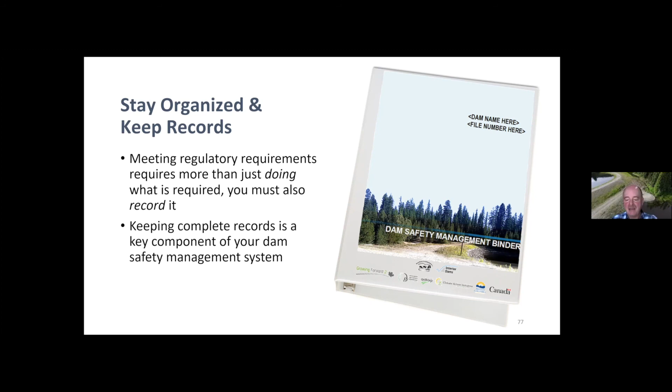And of course, the dam safety section in BC has a lot of these same resources available. We talked about that last week. Make sure you're familiar with that website - it's pretty fast to find. Just type in Dam Safety BC, and I bet you find it really fast in the Google search. And then once you're in there, you can find various resources.

And of course, use your dam safety officer as a resource too. Feel free to give them a phone call. You can find their contact information on the website.

Dwayne, a quick note to the last - yeah, you can be on that slide. I just sent a URL to everyone. The second last one - the last one goes right to that page. Under this project, we maintain an internal document of all the available documents from BC that are related to dams. So what we've done in that second last link on the chat, if you click that, it'll upload the PDF document that lists every single one of those documents. They're all hot linked, so as long as you're connected to the web, it'll bring you right to them. And it has a quick blurb about what's in it, just in simple terms, and a quick blurb about how it's useful as a dam owner.